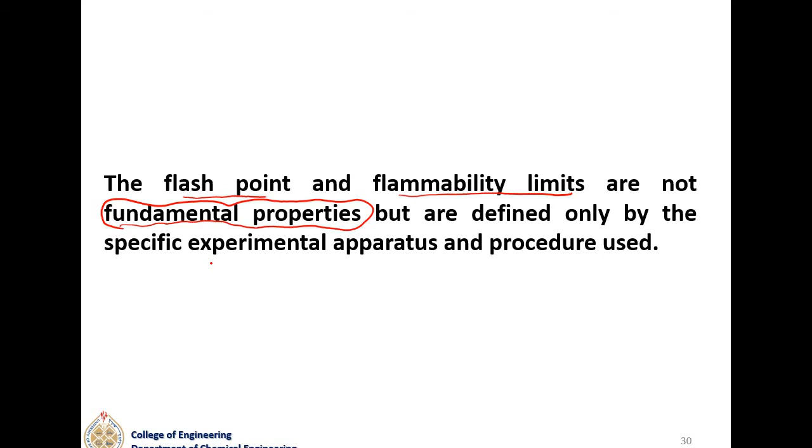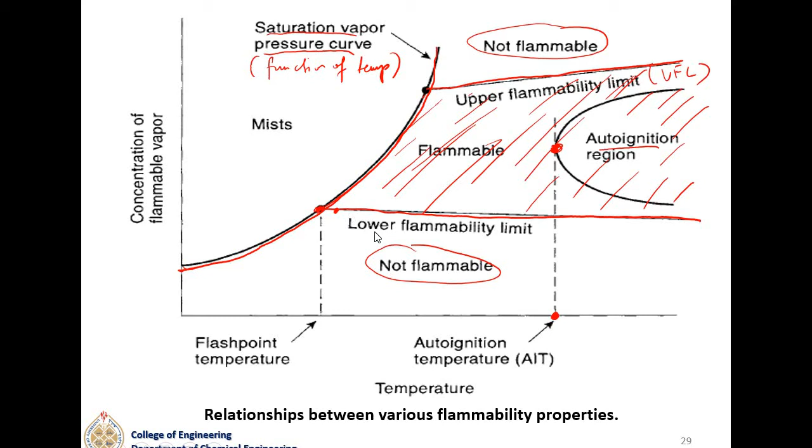Okay, so these are the things that we have taken from last time, and it's good to see the differences. And it's very important to know that this flash point and flammability limits that we are finding are not fundamental properties, okay? It's not like density, viscosity - they are not fundamental properties, but all of them are specified through experimental apparatus. So all of these limits that we can see here are all found through experiments.

Great. So now we're ready for 6.4. So now we know all the definitions about flammability, UFL and LFL. Can we work more now about it? Yes. Flammability characteristics - we can know those characteristics of the flammability of liquids and gases because everything is there in Appendix B. So where is Appendix B?

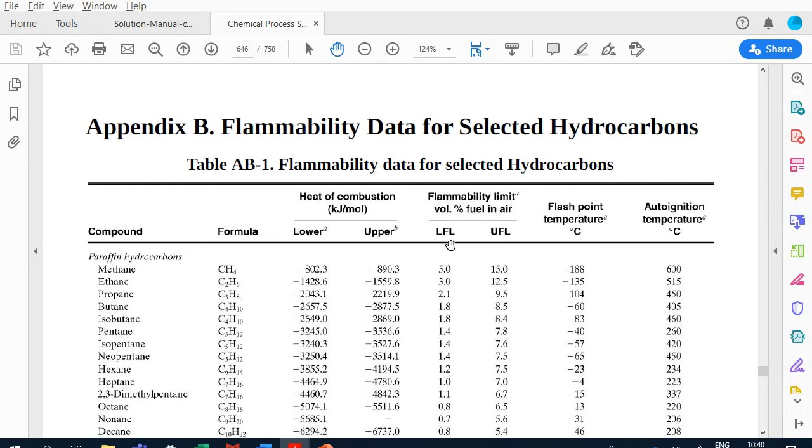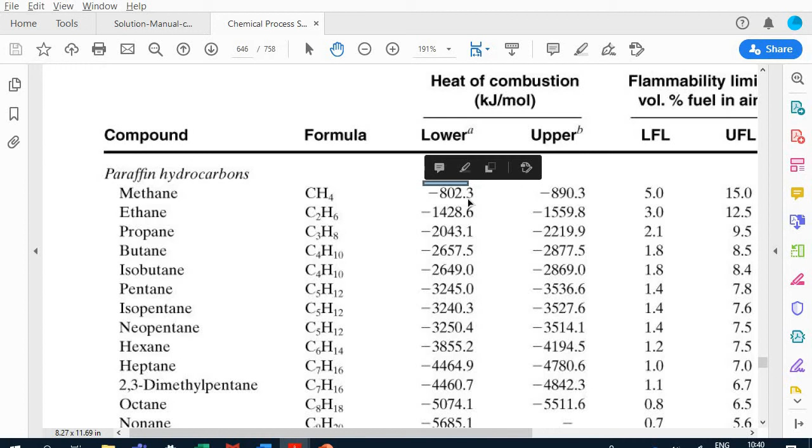So if you go to your book at page 646, you're going to see here Appendix B, flammability data for selected hydrocarbons. And for example, if I want to talk about methane, so here I have methane, and this methane, the lower heat of combustion, which is the lowest energy that we have that comes out.

Well, let me go to the flammability limit. The flammability limit for volume percent fuel in air, the LFL for methane, is 5. The UFL, upper flammability limit for methane, is 15. What is the flash point? Flash point is minus 188. So you can see how low that flash point is, and it just gives you an indication that methane is ready for any fire.

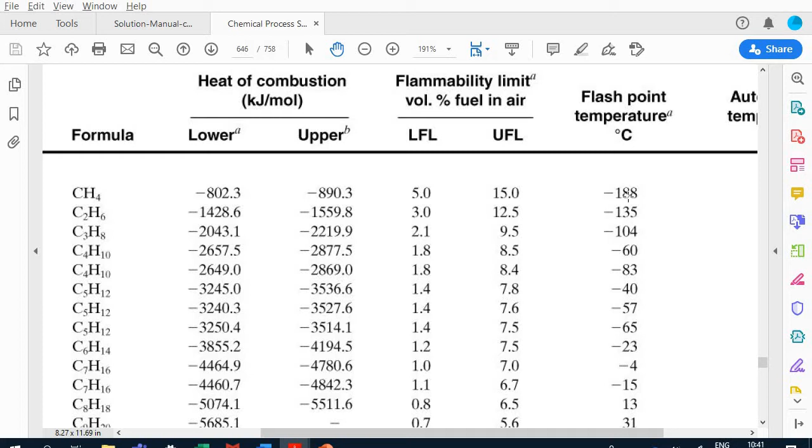It's just a very small source of ignition because it's already within room temperature, right? So it's much above that, which means if you want to store methane, I think it will kill you and you will not be able to do that. So what is the auto-ignition temperature? Now, on the other side, the auto-ignition temperature is 600.

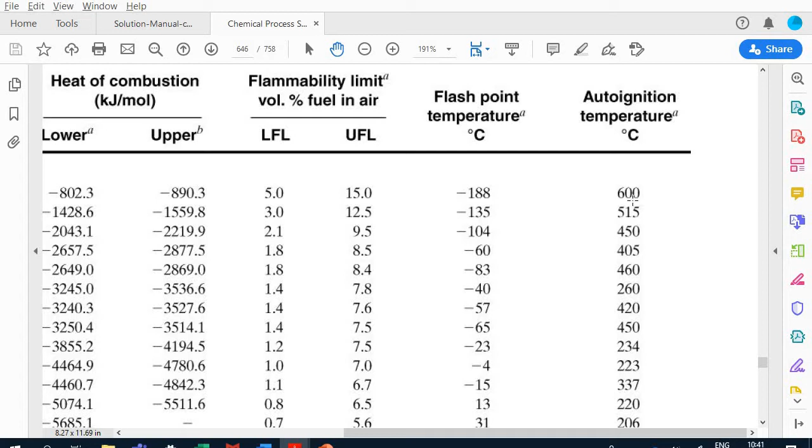That means if you heat it to a certain limit of 600, now it will auto ignite by itself and catch fire, even without a source of ignition. That heat is enough as energy to start the process of ignition, and the reaction happens for oxidation.

So this is what we have here for the flammability characteristics. Let's continue. Flammability characteristics, you can find in Appendix B. The flashpoint temperature, we already can see it in Appendix B.

We already said that flashpoint temperatures can be obtained using the open cup method or the closed cup method, just to get an idea, very briefly. But what is the Bunsen burner setup we use to find out the flashpoint temperature?

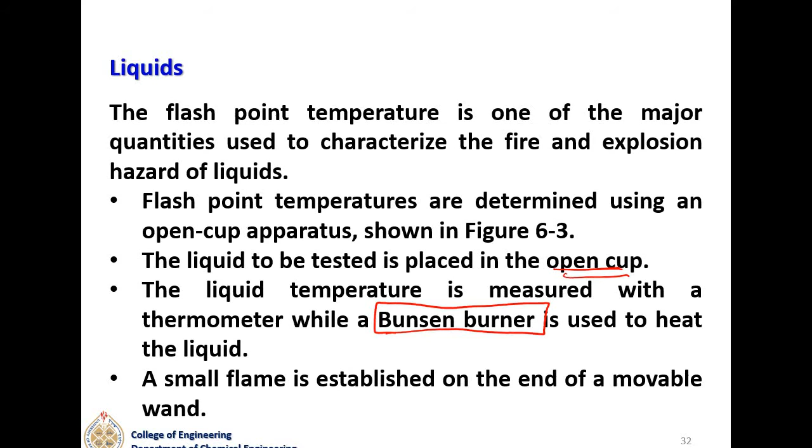So here, for example, this is like the open cup setup. What you can see is you have a gas supply, and with the gas supply you have a test flame, which is a very small flame. You're increasing the temperature and making sure you catch when you're going to get your first ignition. This is the thermometer, where you're every time checking what is the temperature at which you get this flame. So you're heating up with the heat plate.

So this is like the heat plate. It's heating up what? Heating up my cup. If you can just see the cup, where's my cup? This is my cup here, that is my cup, open cup. And what do you have here? You have the heating plate, and of course you're going to have vapors of what is in the cup.

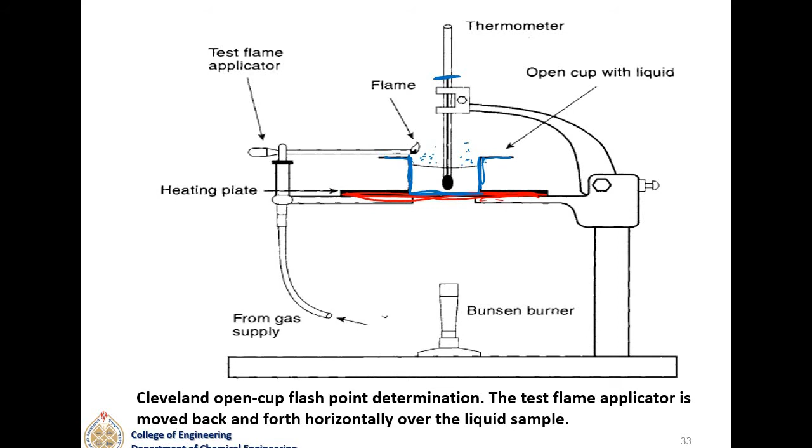The time that you just get this flame tells you the temperature, the flash point, which we are going to identify. And you can see that this is mainly experimental, so it's not a fundamental property. It changes with many different conditions, and it's very difficult to fix all those conditions, so we just get it experimentally.

So if I would say, is there an easy method for calculations? Someone did the experiments for us to identify the flashing point for many different materials. Yes, there was Satyanarayana and Rao, who showed that the flash point for pure materials correlates with the boiling point.

There is a relationship between the flash point and the boiling point, and they did this for 1,200 compounds. They helped us, and told us this has an error of less than 1% using this equation. This equation tells me that TF, the flash point, is a function of A, B, C, and the boiling point. We can get the boiling point from properties of materials.

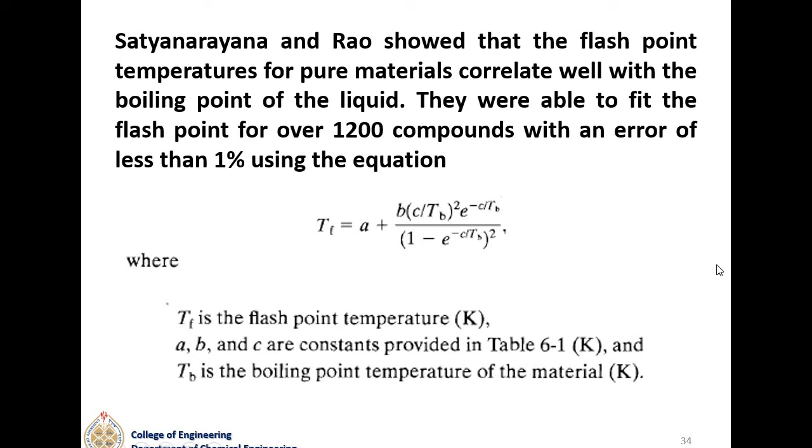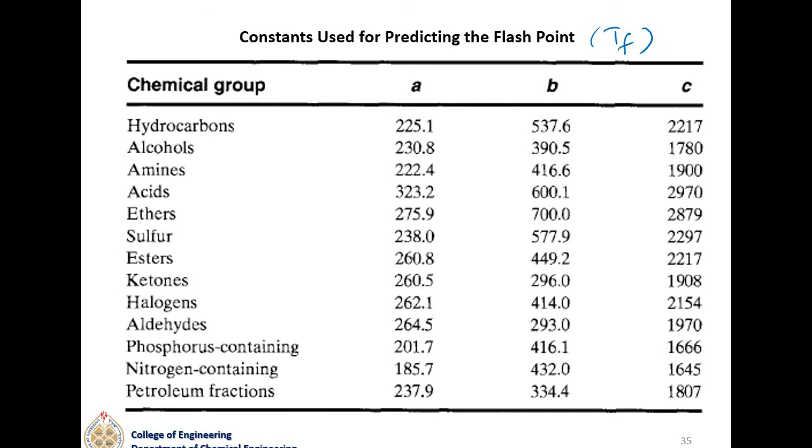That's easy, so we only need A, B, C. Where to get A, B, C? You get them here. You see A, B, C for hydrocarbons - any hydrocarbon: methane, propane, butane, pentane, and so on. And for the rest, alcohols, amines, acids, ethers, these are the values you have for A, B, and C. You just substitute to get the TF, the flashing temperature.

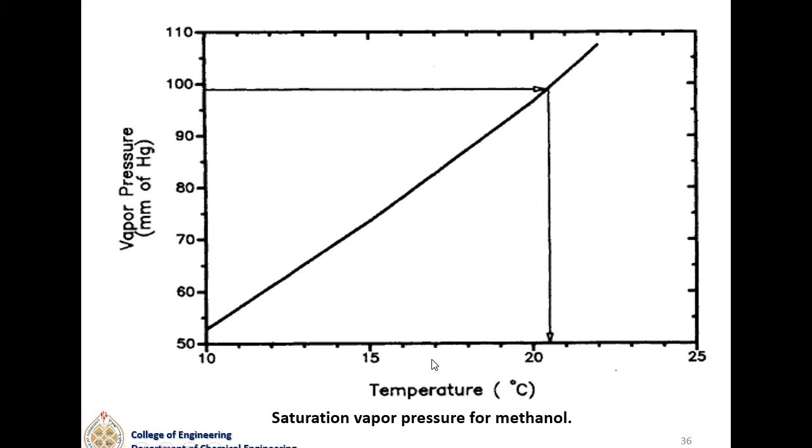One important thing I already mentioned is that the vapor pressure is going to be changing with temperature, and it just increases with the increase in temperature. I just wanted to mention that because it's important.

One more thing you need to know: between the lower flammability limit and upper flammability limit, you're going to have your combustion, your flame, right? Below that, no combustion. Over that, no flames at all. So it's only between these two limits.

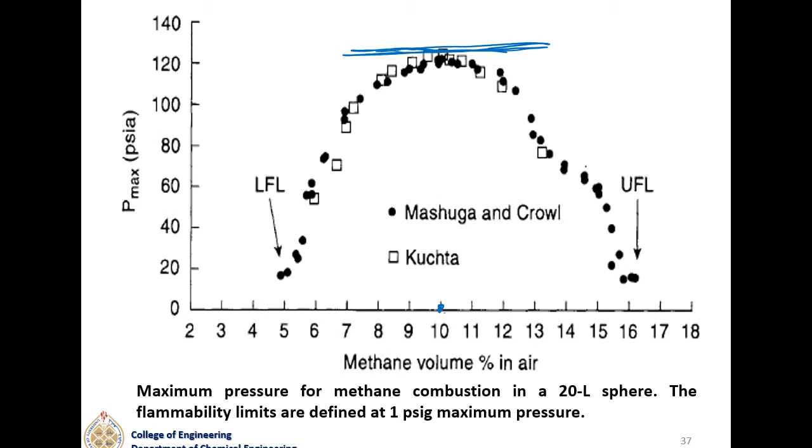However, between these two limits, it is not always that you're getting the same energy, the same pressure - you're getting different pressures. The amount of energy coming out of that reaction is different. We can see that about 10% volume percent of methane in air gives us our maximum value, and of course this will be different for different volumes or different materials.

So that was about liquids in 6.4. Now, that was about liquids for 6.4 and talking about the flashing point. Now we want to talk about gases and vapors.

Gases and vapors also have flammability limits, determined experimentally, in a specially designed closed vessel apparatus. Vapor-air mixtures of known concentration are added and then ignited. So this is what we do - we try to ignite our vapor air mixture.

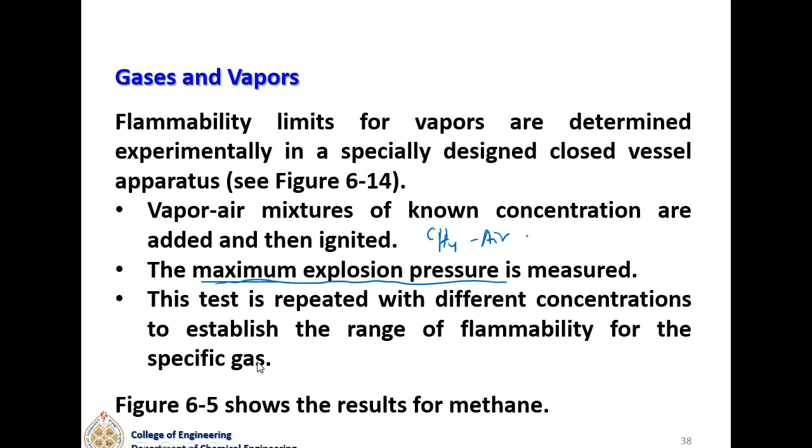So for example, we have methane-air mixture, and we want to know exactly when it ignites. We also know that if it ignites in gas form, we may have a maximum explosion pressure, and we want to know what that maximum explosion pressure is. The test is repeated with different concentrations to establish the range of flammability, to know the lower flammability limit and the upper flammability limit.

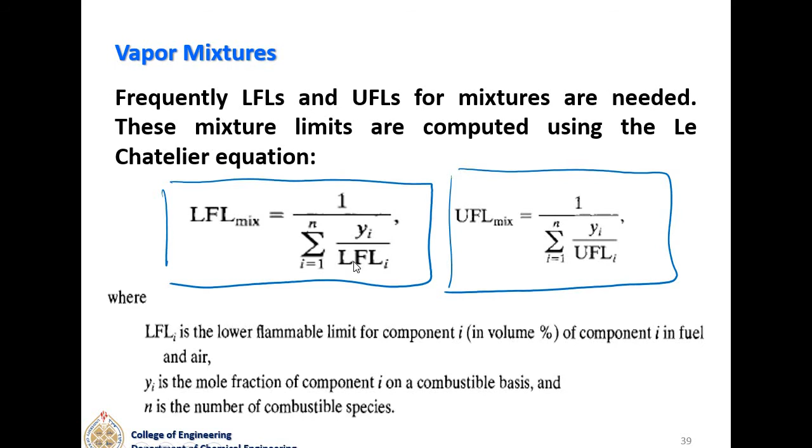Flammability is usually calculated at 25 degrees, since all our properties are provided at normal room conditions. So if I want to calculate LFL at a different temperature, this is the equation I'm going to use. You can see this equation assumes a linear relationship, and what I'm doing here is just an interpolation.

So what is the equation? It's LFL at 25 degrees minus 0.75 over the delta heat of combustion at 25 degrees, which we can already get from Appendix B. In the case we have more than one component, we calculate the net heat of combustion, then multiply at the temperature we want to find the LFL at, minus 25, which is the original temperature. So these are the two equations for LFL.

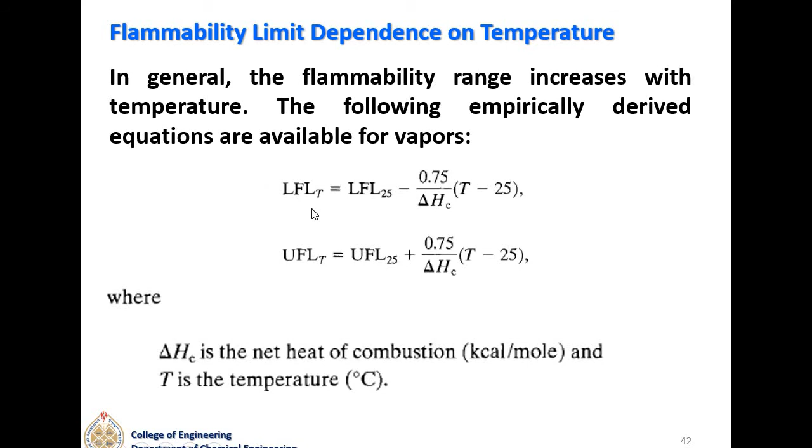These are the equations to find the mix. If you want to find a different temperature, you use this equation. And if you want to find it at different pressures, you're going to use this equation here. You can see there's only one equation we have for UFL.

What about LFL? So what I said here at the beginning, pressure has little effect on LFL, except at very low pressures, where flames do not propagate. So what we're trying to say is that LFL does not change with pressure. We just assume that our LFL does not change with pressure.

However, the UFL increases significantly as the pressure is increased, and this is how we can see it. Of course, when we say UFL increases significantly, what does that mean? That means the flammability region became bigger, right? So instead of having a flammability region, if you remember, this was my curve, the vapor pressure curve, and here we had mist, and here we have the lower flammability limit and the upper flammability limit and the auto-ignition region here.

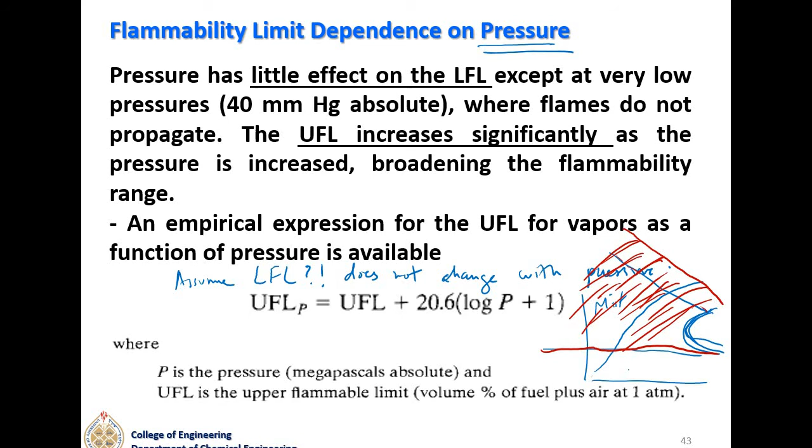So that is the effect of pressure. It just makes it much wider for a flammability region.

For some situations, it may be necessary to estimate the flammability limits without experimental data. Usually you find them through experimental data, and we've already seen how to do this.

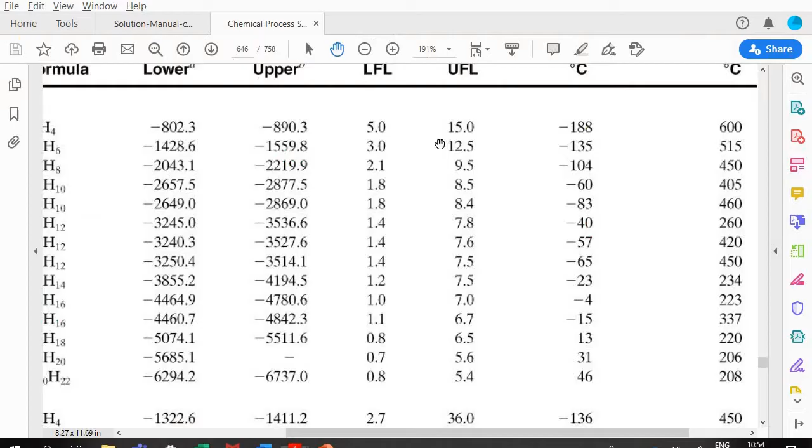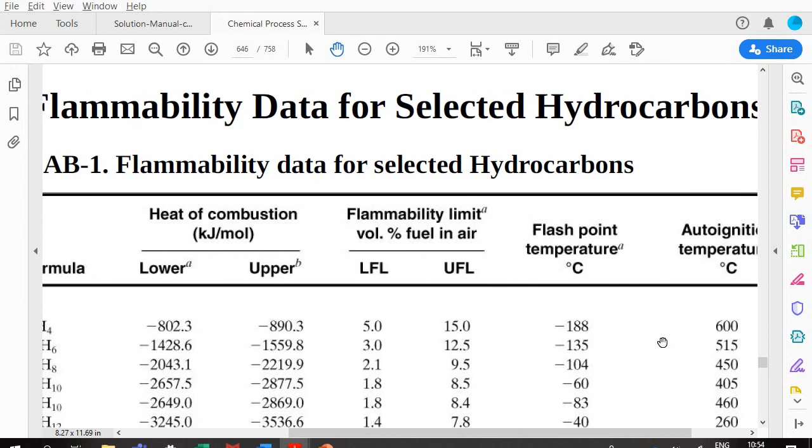You already have flammability data for selected hydrocarbons, where we have the LFL. You can see the LFL in the middle here, and you have the UFL. Let me see if I can highlight this thing here. So you have the LFL and the UFL, okay?

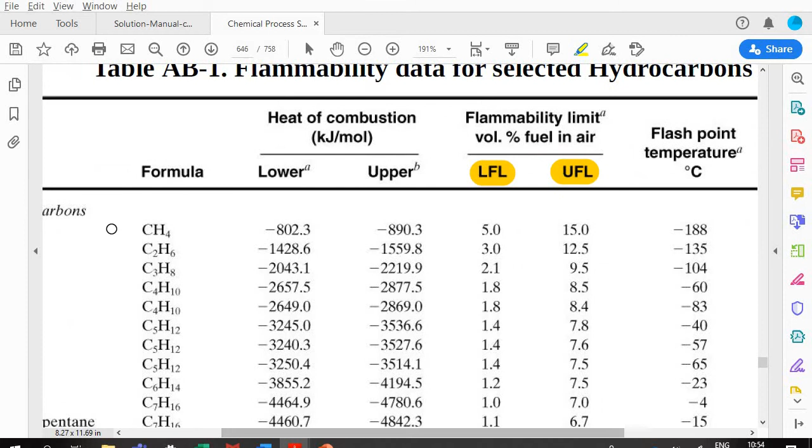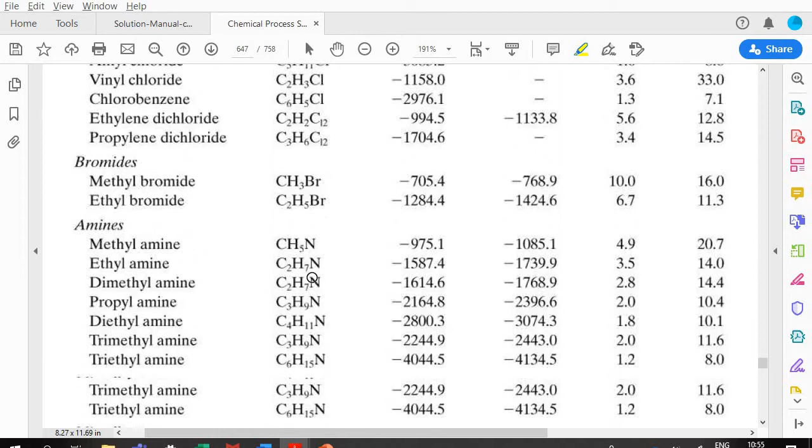So you already have these two values. And for what? For many hydrocarbons - selected ones, of course. You can also see terpenes, alcohols, aldehydes, ethers, ketones, acids, esters, and so on. So you can see that a lot of this has already been done for us.

So what we are talking about here is that sometimes we need to do our own calculations as well. There have been many attempts, and good attempts I would say, to calculate the lower flammability limit. So the first method to identify the flammability limits is that LFL is equal to 0.55 times the stoichiometric concentration.

You call it the stoichiometric concentration. And of course, the first question comes here: what is a stoichiometric concentration? Or how can we really find that?

Jones found that for many hydrocarbon vapors, the LFL and the UFL can be a function of the stoichiometric concentration as follows. What is the CST? It is the volume percentage of fuel in fuel plus air - the percentage of fuel divided by fuel plus air.

To make it easy - it seems easy, but let's see a general equation. If I have something like a generic hydrocarbon compound which has C, H, and O - of course for hydrocarbons we don't have O, so Y is always 0.

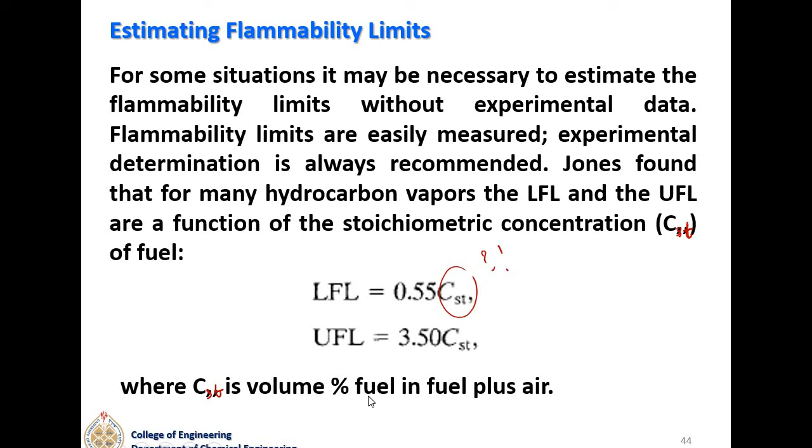So let's go and see it back. Okay, so what do I have here? Z has the units of moles of O2 divided by moles of fuel.

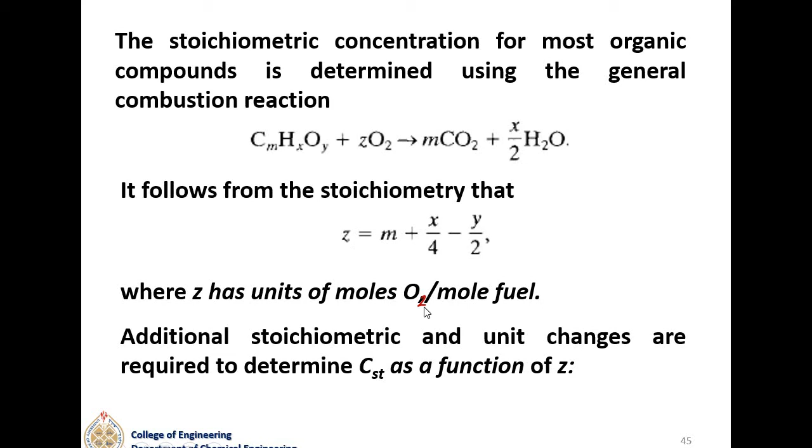And CST as a function of Z, which is that stoichiometric ratio, is equal to moles of fuel divided by moles of fuel plus moles of air, multiplied by 100. Just rearranging it, and we know that oxygen is 0.21 of that air, right? So it's 0.21 of that air.

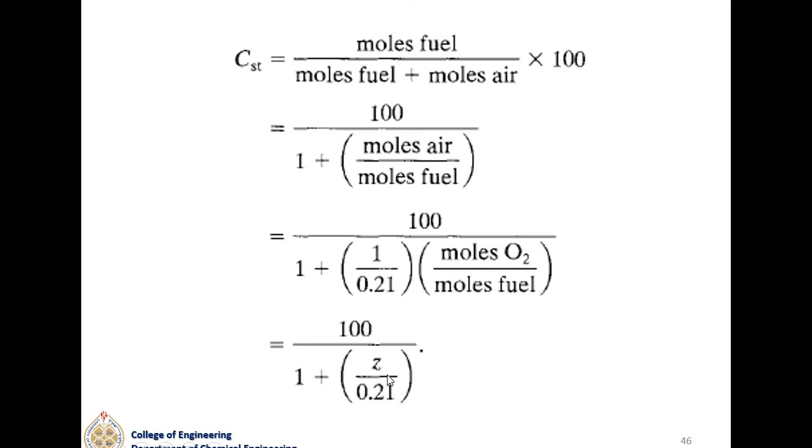Rearranging, doing our calculation - oh my god, it didn't show me the equation. Okay, so that was the equation: 100 over 1 plus Z over 0.21. Of course that was the case that we have air, and this is the equation we have obtained here. Actually there are simpler equations, and we're going to see that in a moment.

So where did he get the 11 thing here? It's already given to us. If the UFL for a substance is 11%, I was going to take you to Appendix B. I thought that they gave us the name of the material, but we don't need to do that because it's given to us.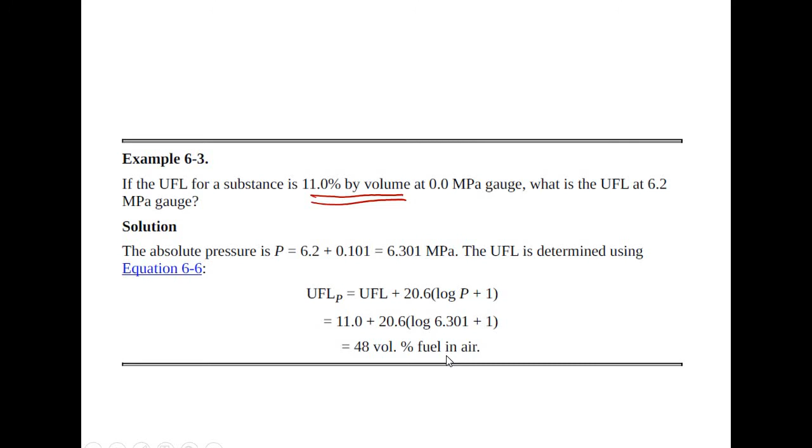And remember that it's always percentage by volume, okay? Percentage by volume. I think this is straightforward, and it just tells us now the UFL is 48% of fuel in air, okay? The upper higher limit, it increased.

So now considering what we have taken, are there other ways of finding the lower flammability limit and the upper flammability limit? Yes, there are other ways. You can see this is another way in which you can calculate the LFL and UFL. And actually you can also find a way in which you can find the lower flammability limit based on the heat of combustion, and the upper flammability limit based on the heat of combustion.

So you can see there are different ways. We found that we can find it through the CST, right? Or you can find it directly using the XYM thing, okay? This is like one method, and this is like another method. That was from the top there. And now we are using the delta heat of combustion. So these are different ways of how to calculate the LFL and the UFL.

So let's see an example now, just to get that grasped by our mind. Estimate the LFL and UFL for hexane and compare the calculated limits to the actual values determined experimentally. The stoichiometry is that, so this is the equation that we have, right? And what are the values? It's already given to me.

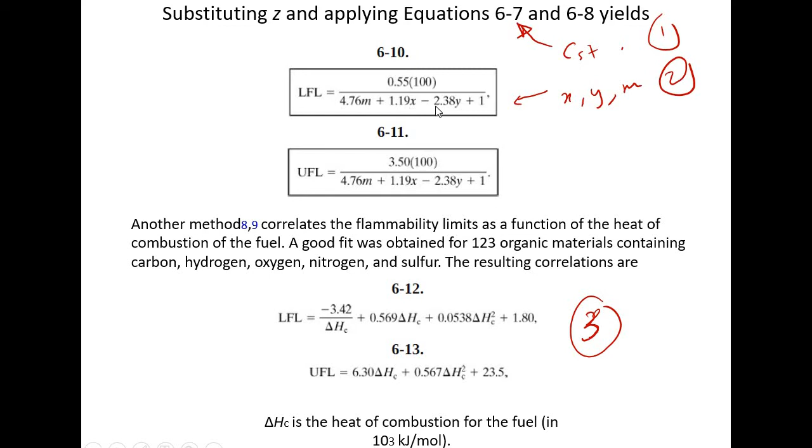So let's calculate. LFL, you're going to use equations 610 and 611. What is 610 and 611? You can see it here, okay? 0.55 into 100, that's 610, divided by 4.76m plus 1.19x minus 2.38 into y plus 1. So what do we have here? 0.55 into 100, over 4.76 into m plus 1.19 into x, plus, of course there's minus something, 0, plus 1.

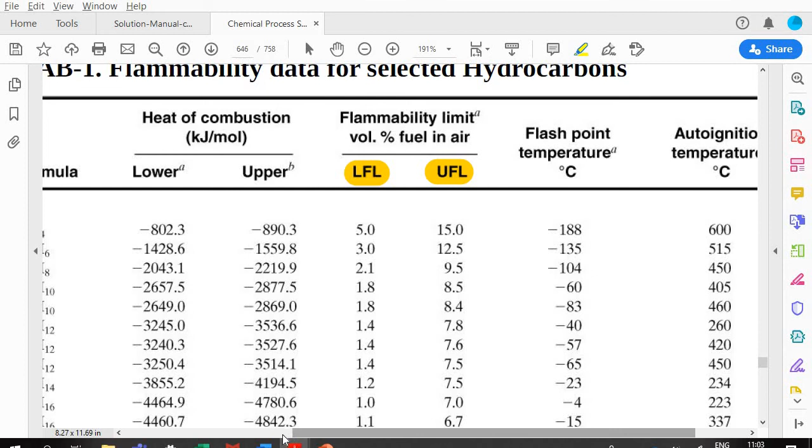Okay, so you're going to calculate the LFL. If you calculate the LFL, you're going to find it as 1.19 volume percent. Compare this, C6H14, which is hexane. Okay, and let's just go to Appendix B and see what is the value. The value for hexane, C6H14, it is 1.2. LFL is 1.2, so that is 1.2.

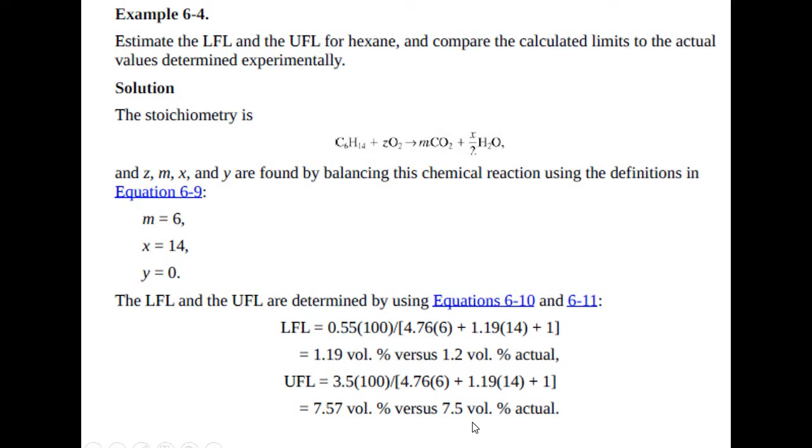And the UFL is 7.5. Okay, so what do we have here? We can see that our LFL, which is 1.2 from the tables done experimentally, our way of calculating it was very accurate, it was 1.19. And you can see that our UFL, done by hand, it was 7.57. Experimentally it was 7.5. That is a very good indication. And again, doing it by hand helps for faster calculations, because it's not always easy to do your kind of experiment to find out the limits.

Okay, great. So this is about the flammability limits in air, right? We're talking about air. What about the flammability limits in pure oxygen? Well, in pure oxygen, things are going to be different. Why? Because you're talking about pure oxygen, not the 21% of air that is oxygen. We are talking about pure oxygen, right? And for that, we have something different that we will state here, which is the lower oxygen limit and the upper oxygen limit, okay?

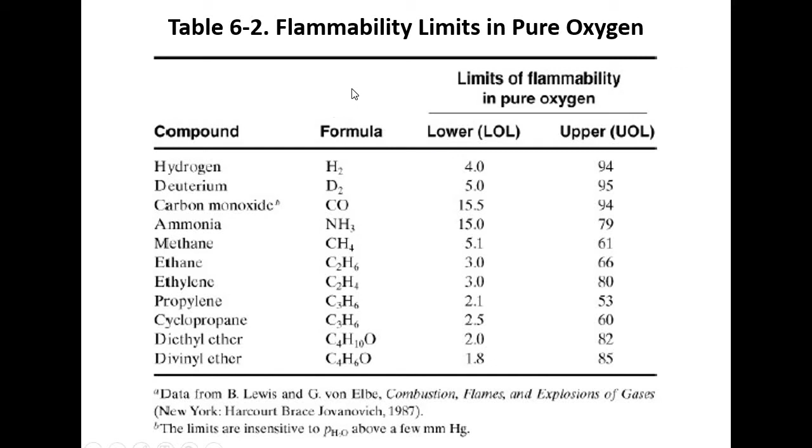So now these are two different parameters as well. But of course, I always go back and say that these are very important because we need to know how much oxygen is available. But even the lower flammability limits and upper flammability limits are very much used because we are always dealing with air. So we need both of them, if I would say, but mainly you will use the LFL and the UFL.

Okay, so just to know how to do my calculation, the LOL is not laughing out loudly. Okay, it's not LOL. So if the LOL, the lower oxygen limit, it is equal to the LFL.

So we just make a very easy definition there. They are equal to each other. LOL is equal to LFL. So it's approximately that.

What about the UOL? Very similar to pressure, where the UFL changes with pressure, the UOL also changes, and it is a function of that equation here. We know UFL, CUOL is a fitting constant, and somehow Hansen and Crowl found a good fit for a number of fuels, and this good fit just keeps one constant for most of them, which is minus 1.87.

So you always can use minus 1.87 for CUOL. Now you have UFL, you have the concentration UOL, and you have CUOL. What you don't have is UFL naught, or UFL oxygen. So what is UFL oxygen? It is the oxygen concentration at the upper flammability limit. Simply, it is the volume percentage of oxygen in air. Let's take an example, and that will clarify things up.

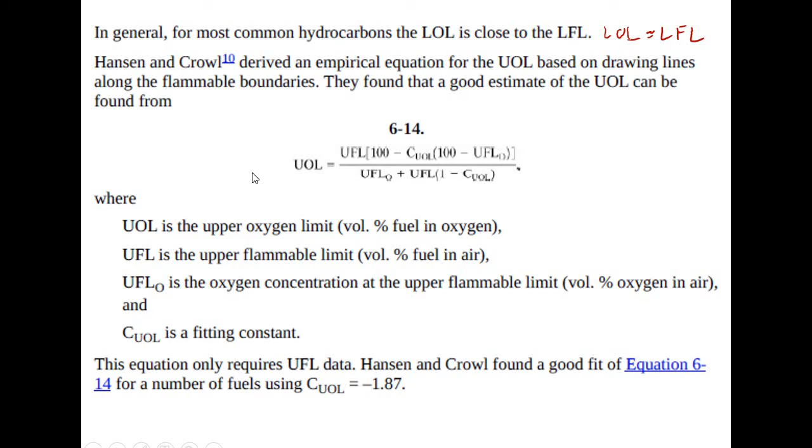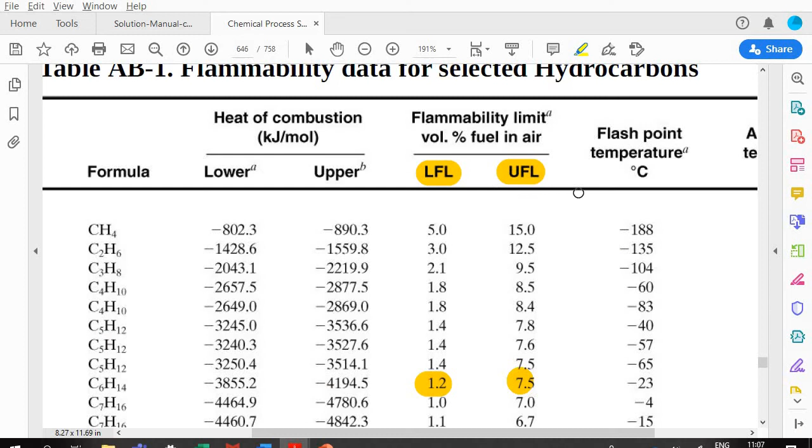Estimate the UOL for methane using equation 6.14, the one that I just presented. From appendix B, we can find that UFL is 15 volume percentage for methane. So UFL is 15%.

If we select a basis of 100 moles, that means how much do I have of methane? I have 15 methane and 85 of air. Again, 15 methane, 85 air. And that is why my UFL, the upper flammability limit for methane here, was 15 moles divided by 15 plus 85, which is 100.

So how much air do I have? 85. How much oxygen do I have? 0.21 multiplied by 85 of that air, I get 17.85. So that is my UFL oxygen. So I have my UFL of methane, I have my UFL of oxygen, which is UFL naught. I'm going to substitute UFL oxygen, and I'm going to substitute my UFL of 15%, and I only have the CUOL, which is minus 1.87, and then voila, I'm getting my percentage, which is 62.4%.

If you compare this experimental value to table 6.2, you'll find that it shows 61%, which means that I got a very good approximation here. If you want to look at table 6.3, that is table 6.2, methane.

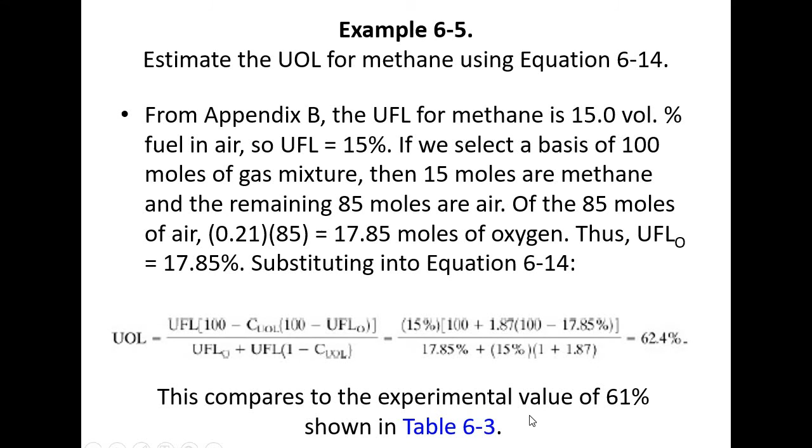So yes, as we said, this is 62.4%. I thought that the value was shown in table 6.3, but actually it's not shown, because table 6.3 only shows the limiting oxygen concentration, which is the LOC. It does not show the higher one. So that is the way of how to calculate the UFL and the UOL.

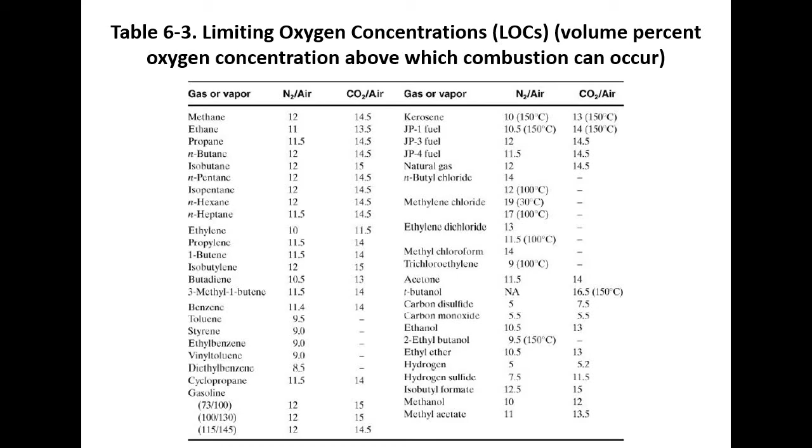Let's take another example. Estimate the LOC for butane. So how do we calculate LOC for butane? As you can see, we have a reaction for butane, C4H10. Of course, we have no O here. And we have written our reaction here: C4H10 plus 6.5 O2, giving us 4CO2 plus 5H2O.

Of course, this is written for you, but you need to balance the equation by yourself. Of course, you're going to find this anywhere in Google, but I say that's simple, that's just a piece of cake. The LFL for butane, from Appendix B, is 1.8% by volume, and then you can find the LOC.

As we said, the only difference from LFL with LOC is that we're going to consider how much oxygen do I have. In this case, I have 1 butane and 6.5 oxygen. So if you multiply 1.8%, the one that I have, with 6.5 oxygen, you're going to have 11.7 volume percentage O2, and that is my LOC.

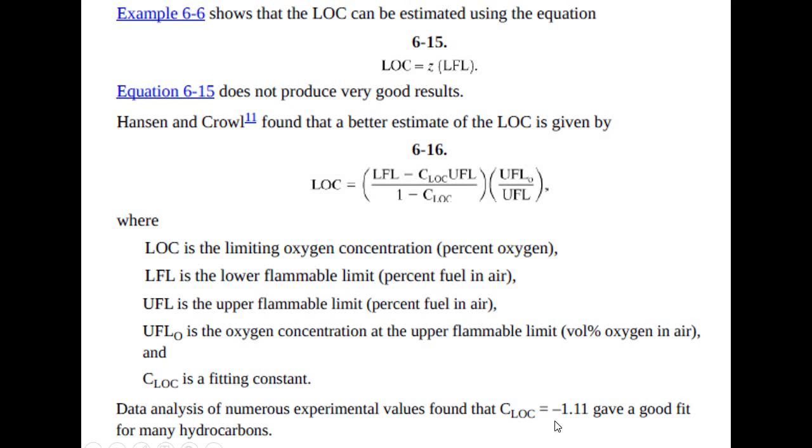Hansen and Crowl found that a better estimate of the LOC is given by this equation - and we know Crowl is one of the authors of this book. This might make the calculations simpler. For LOC, we now have a new constant, CLOC, which is equal to minus 1.11, whereas before we had minus 1.87.

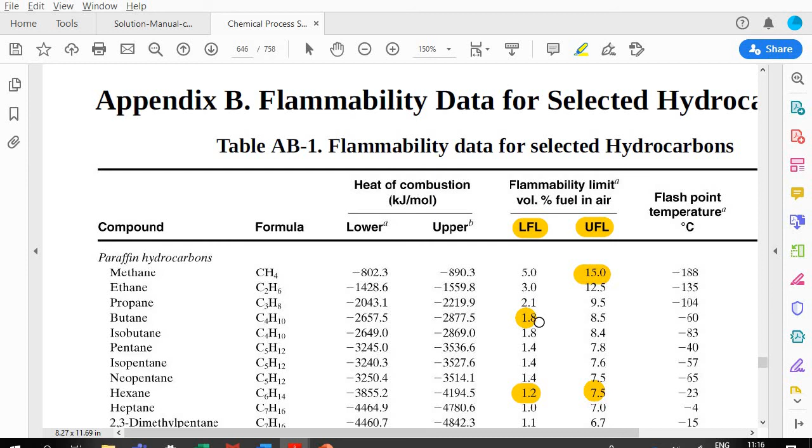This example asks us to estimate using equation 6.16 and compare the results to example 6.6. From Appendix B for butane, LFL is 1.8%. Let's go to butane to confirm - here's LFL for butane, it's 1.8%. What is UFL? UFL is 8.5%. The problem is asking me to find what?

LOC. How do I find LOC? I need LFL, which is 1.8%, CLOC, which is minus 1.11, and UFL, which is 8.5%. The only thing I don't have is UFL for oxygen, UFL naught.

UFL oxygen equals the amount of oxygen, which is 0.21 in air. Why? Because all these problems are within air, so LFL is within air and UFL is within air. To calculate UFL for oxygen, we multiply 0.21 by 100 minus 8.5.

That gives me 19.21% oxygen. Why did I subtract 8.5? Because if I take the maximum amount of butane, which is 8.5, and remove that, the rest is air. So 100 minus 8.5 of butane is air, and multiplying by 0.21 gives you the oxygen. So you calculate LOC, and it comes out to 12%.

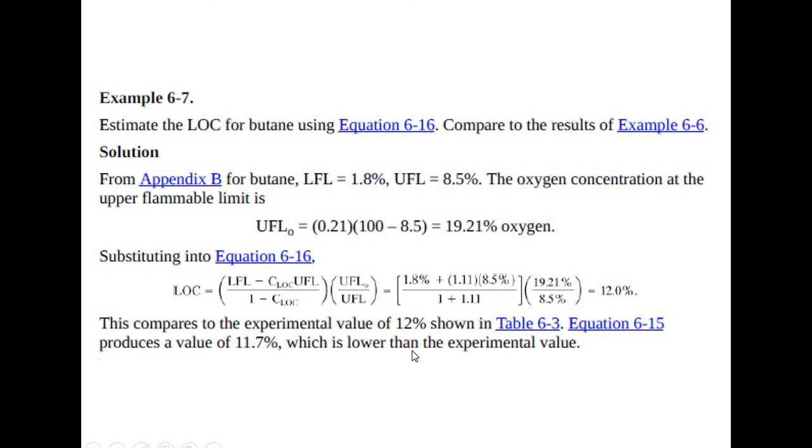So this is what we have for section 6.4. I hope you've learned from what we covered today and what we'll cover in the rest of our lecture. We're going to talk about the flammability diagram, and then we'll move on to explosions.

The flammability diagram - you already remember the triangle. However, now we're going to look at the triangle in a different way, because we're going to use this triangle for calculations. I know that sounds a little strange, how to use a triangle for calculations, but we'll see that in our coming video.